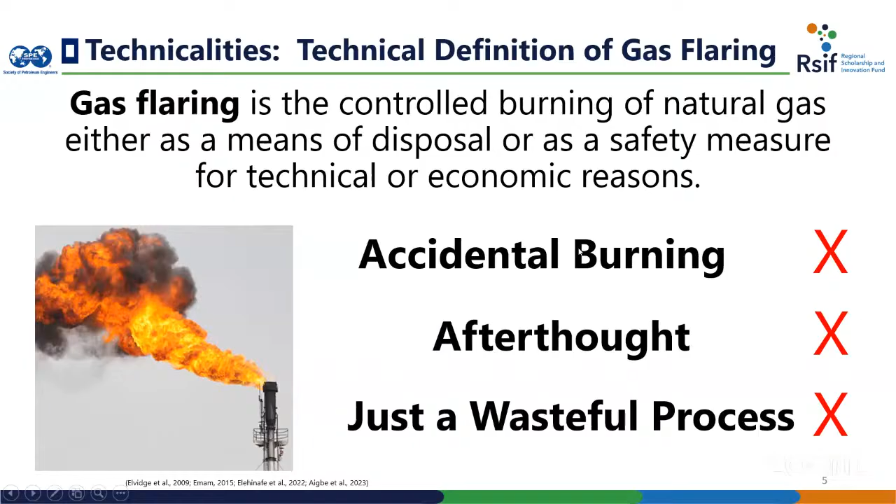But then the technical and the economic reasons are where it actually gets interesting, and we'll be looking at that. So here are the actual reasons for which gas flaring is done. And the first of these all is emergency or safety measures. When you want to depressurize a facility, it is essential that you flare, or else it might explode. And when the gas composition is corrosive, you don't want it to damage equipment or some other facility. So flaring is considered an alternative for this.

And when equipment needs to be maintained, the gas is channeled towards the flare stack as well. All of those are reasons for which gas is flared. And some of these, particularly safety, are allowable reasons why gas flaring is often done. But the most interesting one is the routine flaring and the economic flaring, which is the one that the industry actually flares at.

Now, as you can see in the image, they have put two things on a scale there. And the first is probably a gas gathering facility. And you know that for you to build a gas gathering facility, we are talking about millions of dollars there. And this might be very, very expensive. Or flaring on the other one seems like a cheaper alternative in most cases, because the gas might not be commercial. So when the gas is not in commercial volume, the economics might not be favorable towards building a gas gathering facility. When it is in a very remote location, and you would need lots of infrastructure to be able to tie it to existing infrastructure, the economics might also not be favorable.

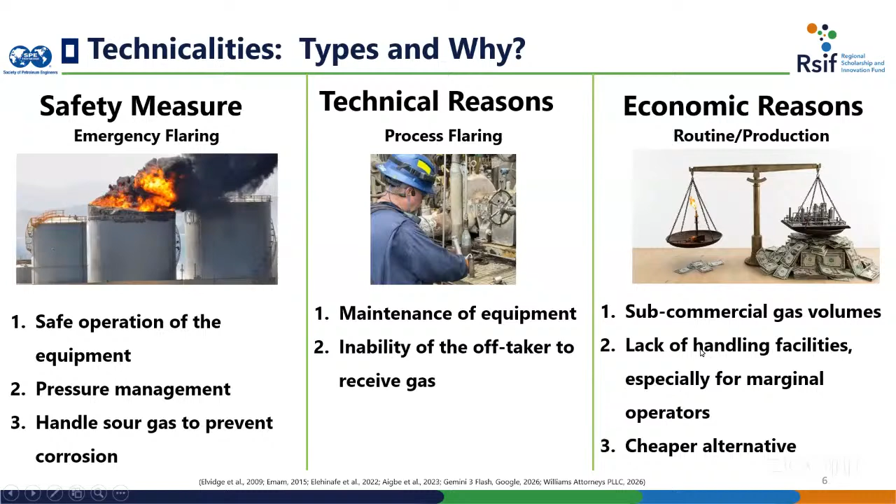So most of the flaring we have, although flaring is also done for safety and technical reasons, most of the flaring that actually happens around is more of routine flaring. And so when we say it is safety, one of the cliches actually says it's a safety measure. So it's more like we are using the excuse of the first column here to defend what happens on the third column here. So we use the excuse of it being a safety measure to defend what we do, because we think it is not economical for us to build a facility.

If you have a gas stream that has a lot of liquid in it, then you want to use a horizontal stack. If you have a large volume of gas to flare, you want to consider using a vertical stack. If you are constrained on budget, then you probably do not want to go for the thermal oxidizer because they are expensive. But when environmental policies are stringent and control measures are actually in place, then things like the thermal oxidizer, although they are very, very expensive, might be considered.

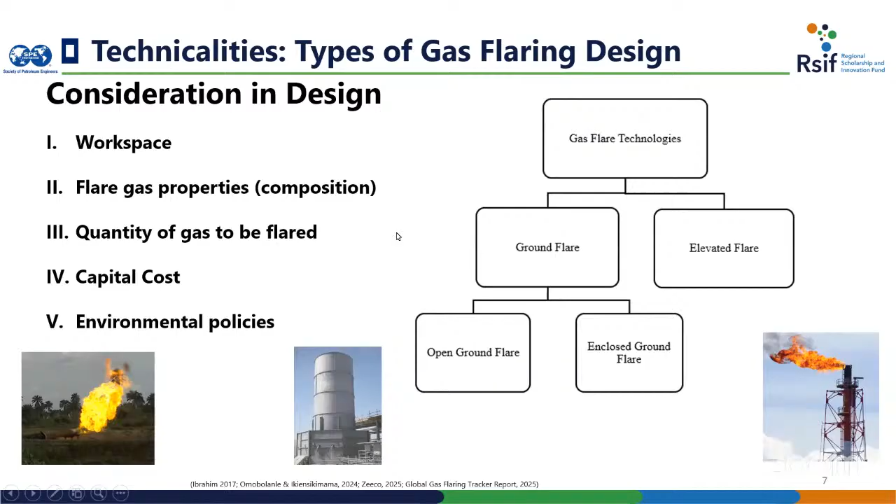Such, these are the various considerations that are used. And we also know that flaring can be intermittent, it can be continuous. So for places where the gas supply is not steady, or maybe there is a need to blow down or to eliminate some gas immediately, at those times they might just decide to flare, and when the gas available is being utilized again, then flaring is stopped. So these are some of the kinds of designs we have, and these are the considerations that are taken into account when design is being done.

Now, venting of methane is not allowed in most places, even under Nigerian law. And that's because methane has more damaging impacts on the climate compared to CO2. So because of that, this methane is burned. We know that natural gas contains predominantly methane, up to around 90% thereabouts. So the methane is burned in the atmosphere to convert it to a less harmful material, which is carbon dioxide. Now, this is what you have in the ideal situation when there is a complete conversion. But oftentimes, this is what we have on the field, the incomplete conversion.

Am I still audible? Can you still hear me? Yes, sir. Okay, good. Yes.

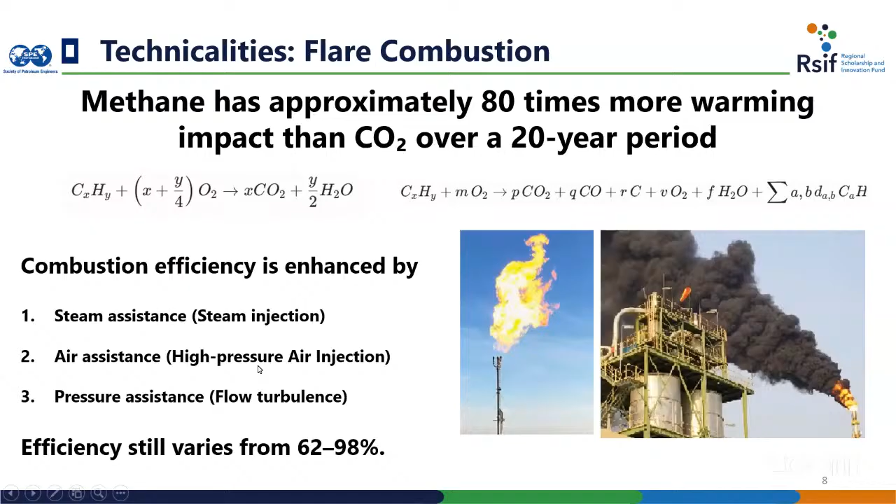So that means about 38% of the flare stream is still not converted, and they are in the atmosphere there, carried around by the breeze and whatever. So here are some of the ways by which they are measured. The constitution or the law in Nigeria mandates operators to install flow devices. So flow meters are installed.

The regulation did not actually specify which should be used. They just mandated that operators should put flow meters or measuring devices. But here are some of the state of the art that are being considered: ultrasonic meters, optical meters, thermal flow meters. These are some of the measuring devices that have been used on field and are still being used on field. In some cases, when flow meters are not available or before they are installed, equations are used as well.

And here from material balance, we know that once you multiply your oil produced with your GOR, you should be able to get the volume of the gas. And from there, when you remove the gas that you are utilizing on the field, maybe to support your operation, then you should have the remaining volume of gas that cannot be handled. And from there, because some of them are actually vented too, although it's not allowed, you can get the fraction or the volume being flared.

But the continuous measurements are done by the operator, because it is the operator that will have to calibrate the meter. It is the operator that has to take the daily log, like the NUPRC mandates them to take daily readings from the flow meter every day. It is the operator that does that. The estimation method, it is also the operator that does the calculation based on their field data.

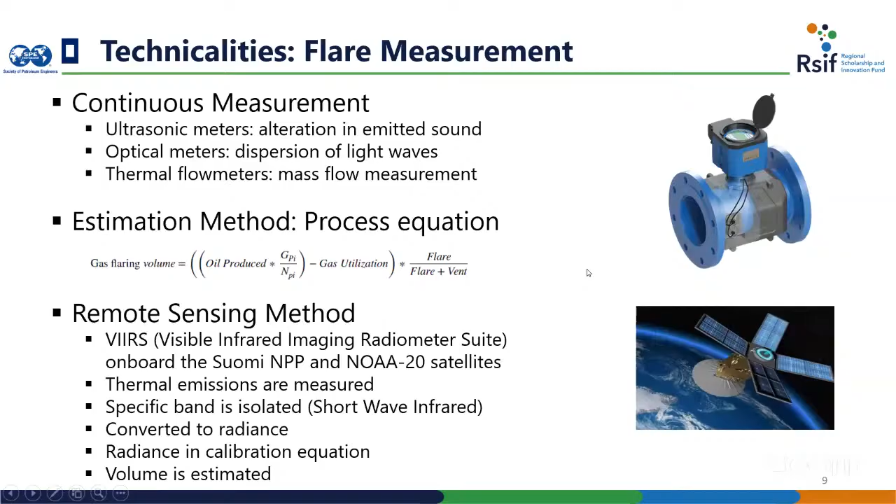Although in some countries, it is noted that gas flare is actually reducing because of some measures that they are taking. But the gains that have been seen in some countries are actually being absorbed or taken over by another. So when a country is going down, another is going up, and eventually it balances out. And if the one that is going down is not dipping as much as the one that is going up, then it might actually go back.

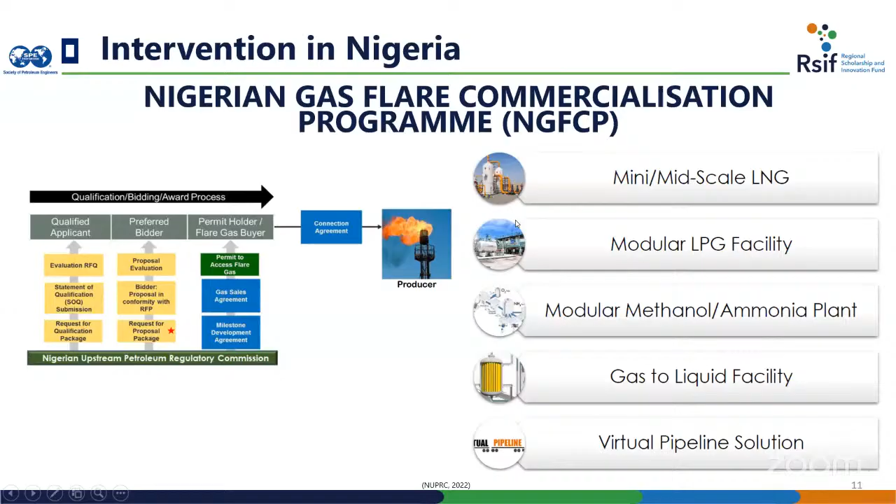And if you've ever followed gas flare literature, there are some communities that, although you've never been to, you will know their name, like the Ogba Egbema community. I've never been there, but there are a number of literatures that have the Ogba Egbema community repeated there. And that will tell you about the reality of people living around there. I've stayed very close to one before, and they can indeed be very, very noisy.

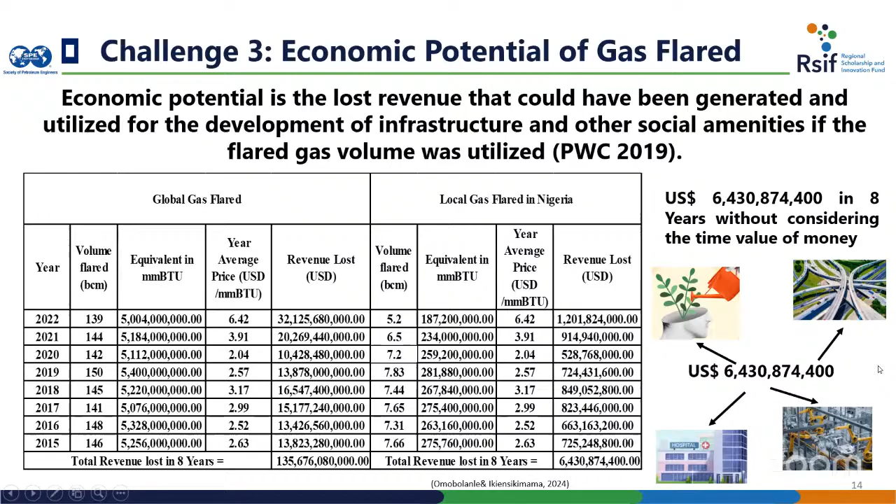And this money could have indeed been used in research for human capital development. It can be used for building infrastructure, for hospitals. And that really is a lot of revenue that we could have used for a lot of other things. Now, but here is where it actually gets interesting.

We know that orifice meters, when the flow stream has liquid in it, break down and are inaccurate. So whereas the regulation says a flow meter must be installed, it does not specify, oh, for a particular gas composition or for a particular purpose, perhaps this is the kind of flow meter. And that opens it up to a lot of ambiguity. So just install a flow meter, that's the point.

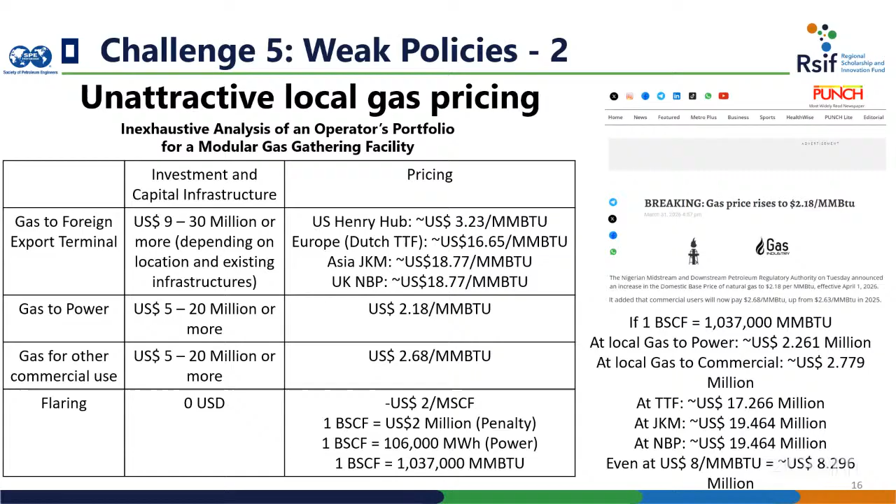And so the problem with Nigeria, if Nigerians can actually buy diesel, which is a very expensive commodity, to power their houses, I do not think the problem would be paying for the power if it is available. The problem would not be the price. So for us to be able to really mop up the gas, perhaps we need a competitive pricing. You don't really want to use the international price, but at least it should be fairly comparable so that the producers would go into it themselves.

Another problem here now for some of the plans, the modular arrangement that we had talked about before, is the uncertainty with business. Now, we know in our industry that whenever we are designing a field development plan, we always design the best case scenario, the base case, and the worst case scenario.

And we do all of this so that you have an understanding of what your cash flow would be. What money would you make per time based on the best case scenario? What would you make per time? And these are the plans that we take to financiers to get money.

But when you cannot predict your production, I mean, an off-taker that is getting 1 million standard cubic feet per day today is not guaranteed of production tomorrow, or even 2 standard cubic feet tomorrow, because the operator has the right of first usage. So you can imagine if I had borrowed money, based on the Nigerian Gas Flare Commercialization Program, built a facility, and paid all I needed to pay to be able to start taking off gas.

And the first month I got gas, and the second month the operator tells me, "Oh, we need to start re-injecting our gas, and we need to bean down a particular well because the reservoir drive is depleting." Now, there's nothing the off-taker can do about this because enshrined in the law is the first priority of the operator. So the operator has the first right to the gas that is produced. So they have the right to inject it first, even before you.

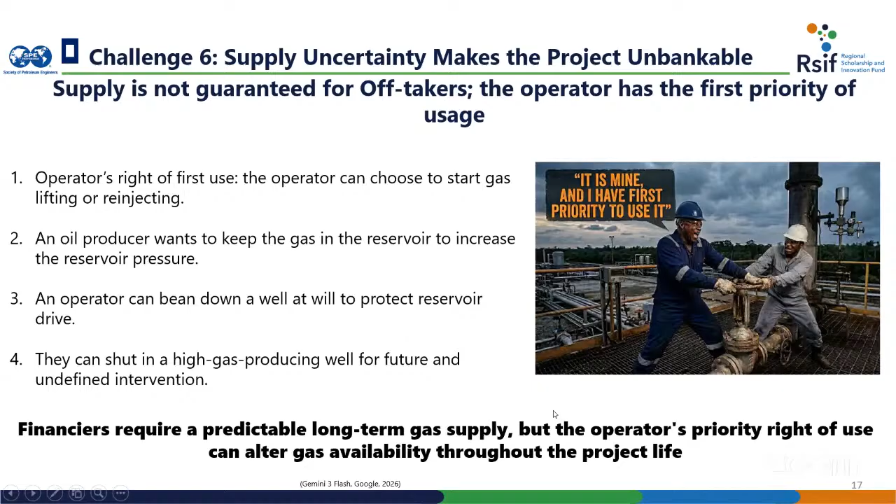And that was why I wrote here, it says financiers require a predictable long-term gas supply. The operator's priority right of first usage can alter gas availability throughout the project's life. And that might even put the permit holder in more trouble.

Now that we have looked at some of the challenges, I'm sure by now most of us are even thinking of... hello? Hello. Yes. Yeah, I can hear you. Can you hear me? Yeah, I can hear you. Yeah, please can you round up? Oh, okay. Yeah, let me just do that now.

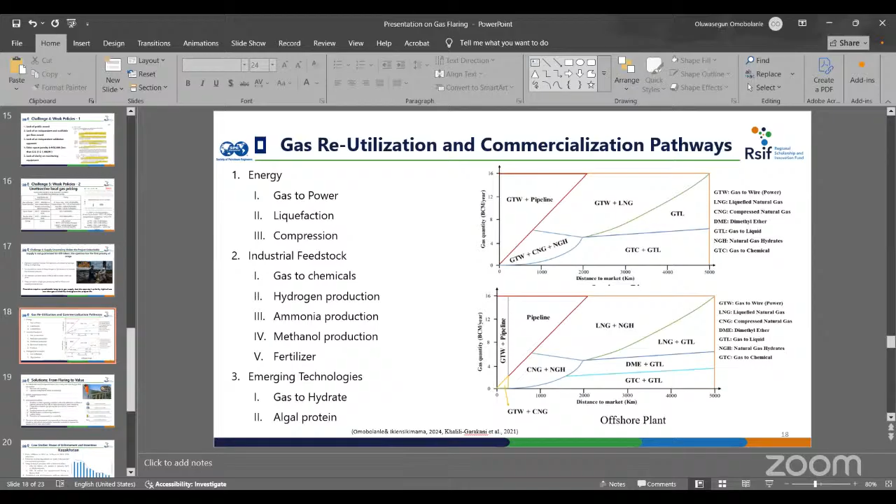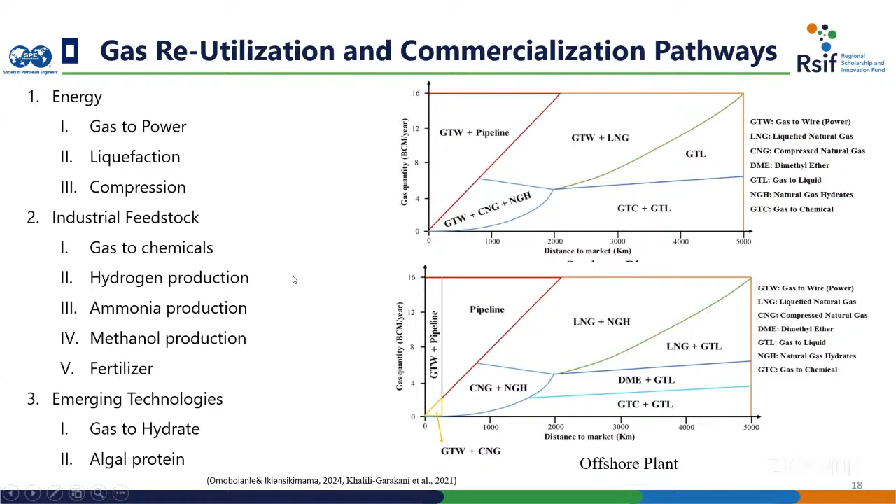Okay, so some of the utilization paths have been designed based on distance. When the gas supply is a certain distance away from you, and based on the volume you have, these are some of the options you can pursue to develop the field. The gas can be used for gas to chemicals. You can produce hydrogen from it. You can convert it to hydrate.

And some of the solutions: I think we can eliminate self-reporting. Myself and my professors have designed a method for estimating gas flare volume just from looking at the picture of the flare. So you don't need flow meters. And some other measures can be taken. Indeed, the plan of NUPRC would work if better policies are put in place.